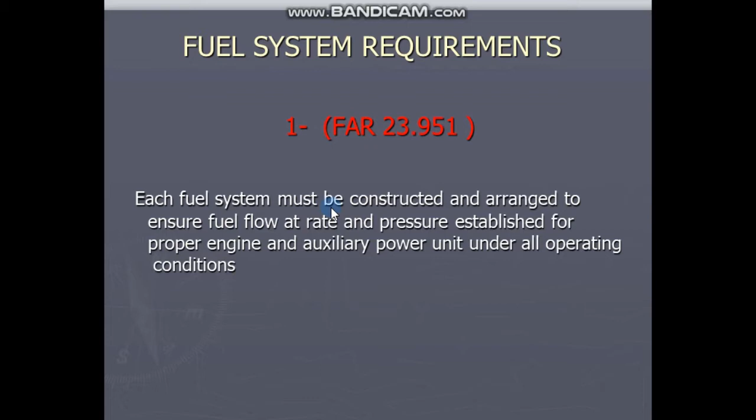The second requirement: no pump can draw fuel from more than one tank at a time, and provisions must be made to prevent air from being drawn into the fuel supply line.

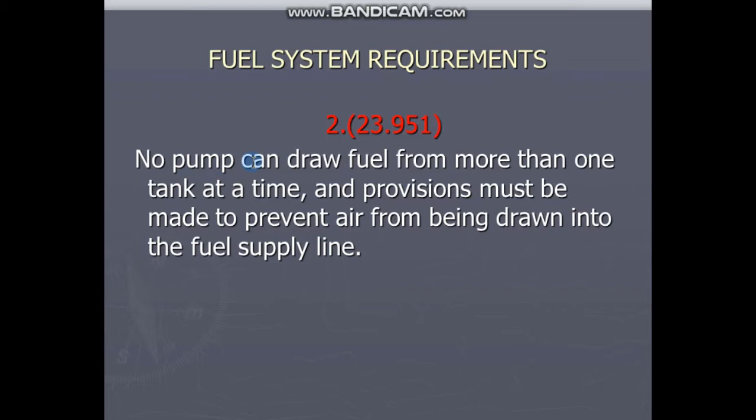Number 3. Turbine-powered aircraft must be capable of sustained operation when there is at least 0.75 cubic centimeter of water per gallon of fuel, and the fuel is cooled to its critical temperature.

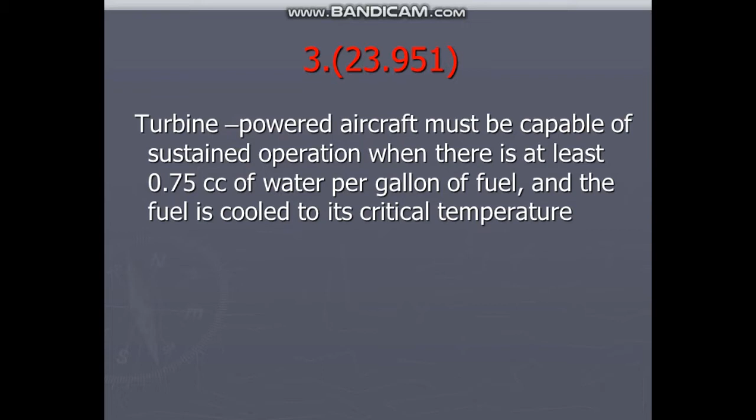Number 4. Each fuel system of a multi-engine aircraft must be arranged in such a way that the failure of any one component will not cause more than one engine to lose power.

Number 5. If a multi-engine aircraft feeds more than one engine from a single tank or assembly of interconnected tanks, each engine must have an independent tank outlet with a fuel shut-off valve at the tank.

Number 8. All filler caps must be designed so that they are not likely to be installed in such a way that could cause an in-flight loss of fuel from siphoning.

Number 10. The fuel system must be designed to prevent the ignition of fuel vapor caused by lightning.

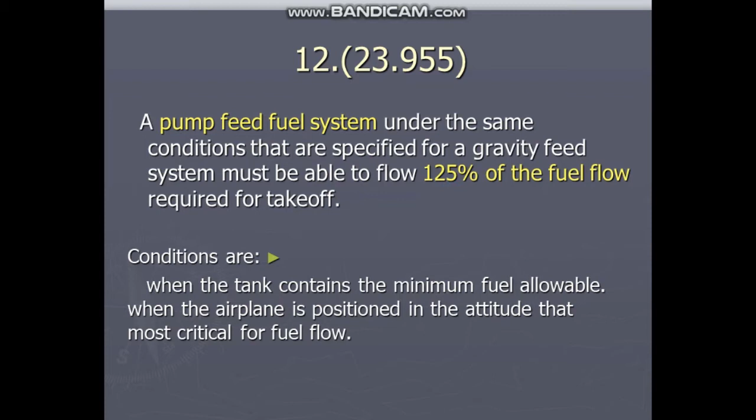You have to take care here: we talk about pump feed and the percentage is 125%, but in the previous requirement we were talking about gravity feed and it was 150%.

Number 13. If the aircraft is equipped with a selector valve that allows the engine to operate from more than one fuel tank, the system must not cause a loss of power for more than 10 seconds for a single-engine airplane, or 20 seconds for a multi-engine airplane, between the time one tank is allowed to run dry and the time at which the required power is supplied by the other tank.

Number 14. Turbine-powered aircraft must have a fuel system that will supply 100% of the fuel required for its operation at all flight altitudes, and the fuel must not be interrupted as the fuel system automatically cycles through all of the tanks or fuel cells in the system.

Number 15. For a gravity feed system with interconnected tank outlets, it should not be possible for fuel feeding from one tank to flow into another tank and cause it to overflow. Provisions must be made to prevent overflow of fuel from one tank to another.

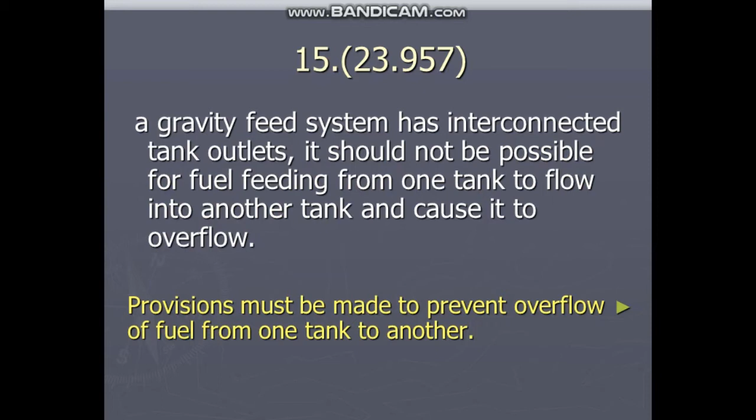Number 16. The amount of unusable fuel in an aircraft must be determined and made known to the pilot. Unusable fuel is the amount of fuel in a tank when the first evidence of malfunction occurs, with the aircraft in the attitude that is most adverse for fuel flow.

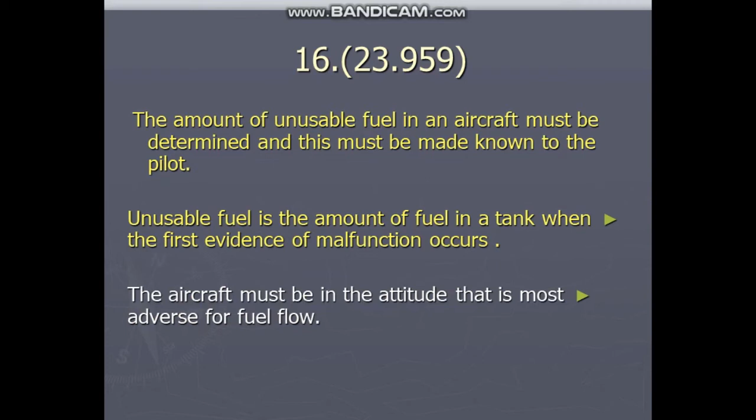Number 17. The fuel system must be so designed that it is free from vapor lock when the fuel is at a temperature of 110 Fahrenheit under the most critical operating conditions.

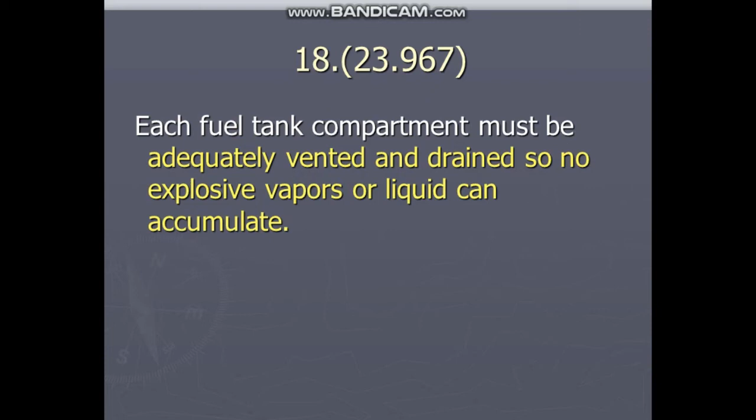Number 18. Each fuel tank compartment must be adequately vented and drained so that no explosive vapors or liquid can accumulate.

Number 19. No fuel tank can be on the engine side of the firewall, and it must be at least 1/2 inch away from the firewall.

Number 20. Each fuel tank must have a 2% expansion space that cannot be filled with fuel. Each fuel tank must also have a drainable sump where water and contaminants will normally accumulate when the aircraft is in its normal ground attitude.

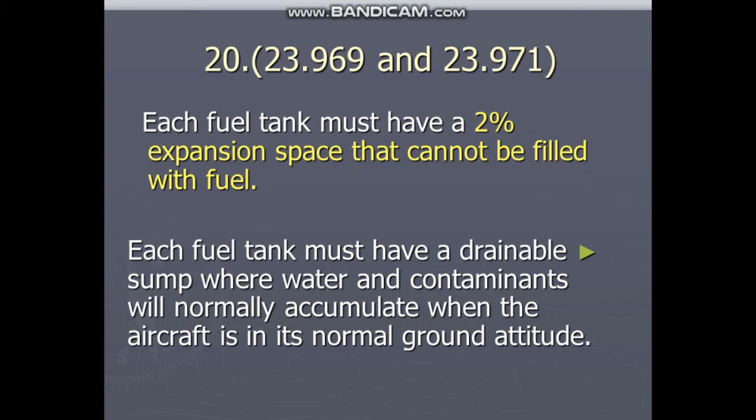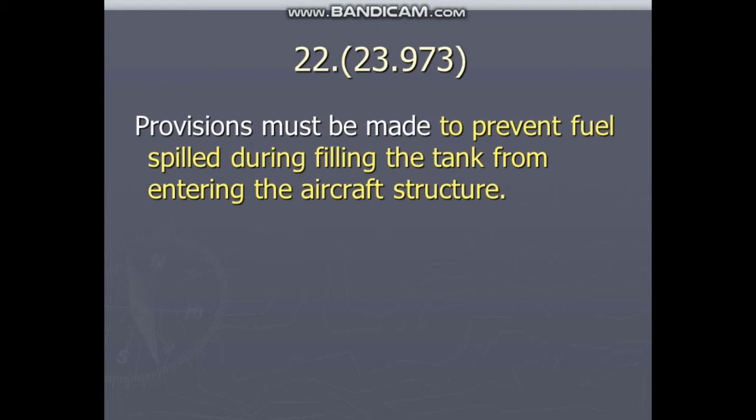Number 22. Provisions must be made to prevent fuel spilled during filling of the tank from entering the aircraft structure.

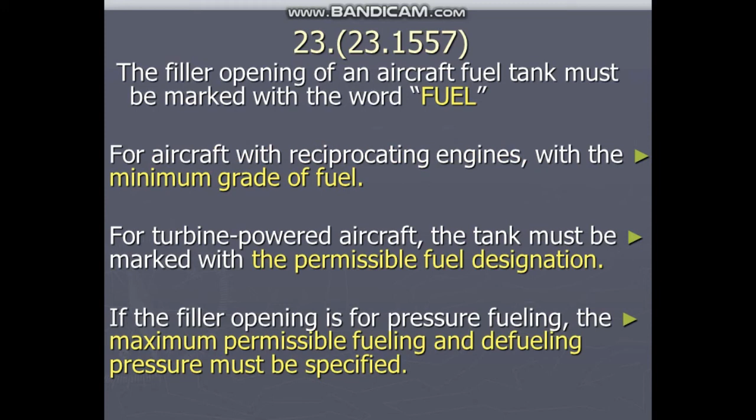Number 23. The filler opening of an aircraft fuel tank must be marked with the word 'fuel'. For aircraft with reciprocating engines, it must be marked with the minimum grade of fuel. For turbine-powered aircraft, the tank must be marked with the permissible fuel designation. If the filler opening is for pressure fueling, the maximum permissible fueling and defueling pressure must be specified.

Number 24. If more than one fuel tank has interconnected outlets, the airspace above the fuel must also be interconnected.

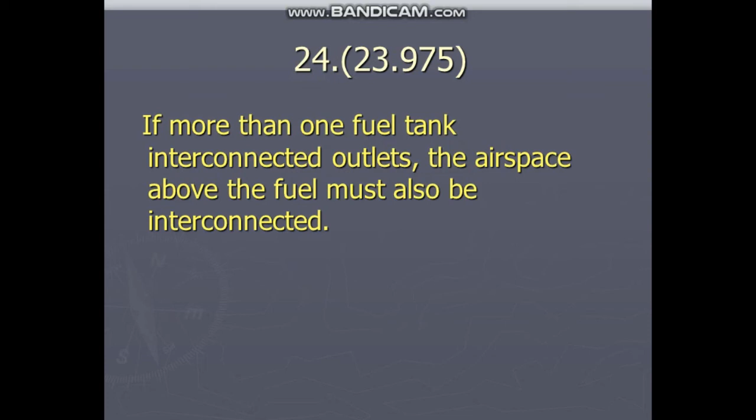Number 25. If the carburetor or fuel injection system has a vapor elimination system that returns fuel to one of the tanks, the returned fuel must go to the tank that is required to be used first.

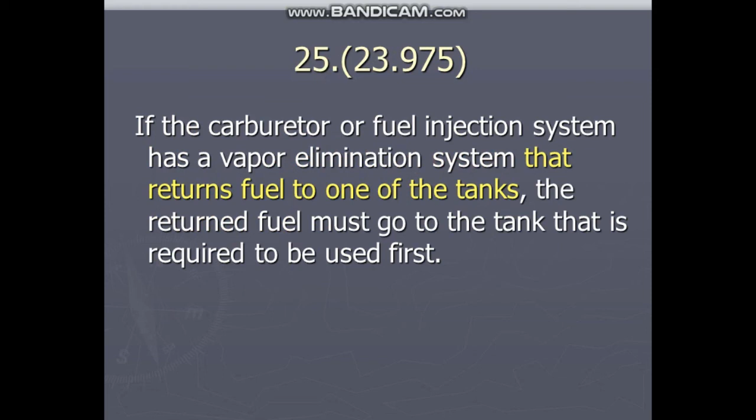Number 26. All fuel tanks are required to have a strainer at the fuel tank outlet or at the booster pump.

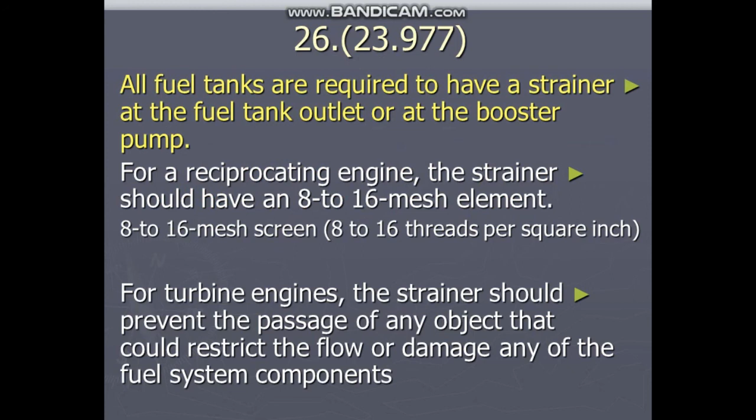For reciprocating engines, the strainer should have an 8 to 16 mesh screen element. For turbine engines, the strainer should prevent passage of any object that could restrict the flow or damage any of the fuel system components.

Number 27. For engines requiring fuel pumps, there must be one engine-driven fuel pump for each engine.

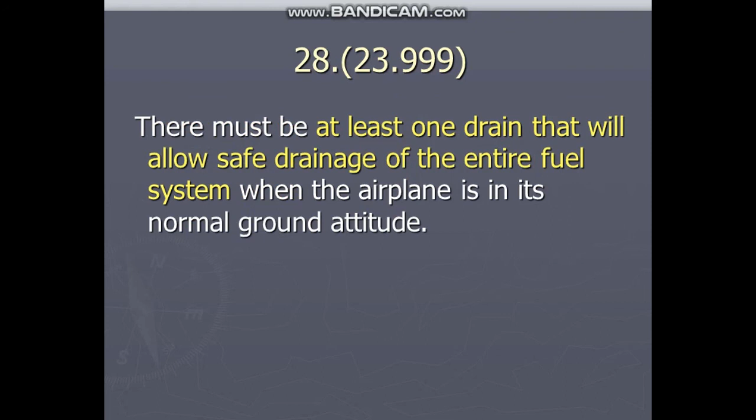Number 28. There must be at least one drain that will allow safe drainage of the entire fuel system when the airplane is in its normal ground attitude.

Number 29. If the design landing weight of the aircraft is less than that permitted for takeoff, there must be provisions in the fuel system for jettisoning fuel to bring the maximum weight down to the design landing weight.

Number 30. The fuel jettisoning valve must be designed to allow personnel to close the valve during any part of the jettisoning operation.